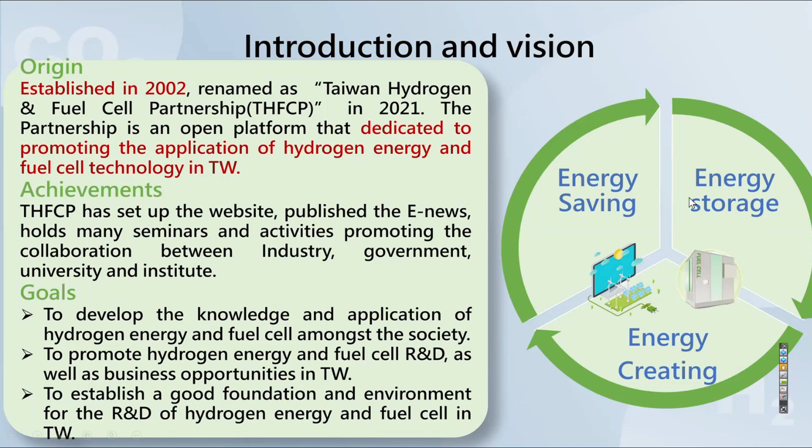Some information about the Taiwan Hydrogen and Fuel Cell Partnership: we were founded about 20 years ago. Back then, our vice president realized that hydrogen is a very important solution for clean energy, so we founded this organization. So far we have over 90 member companies, most of them private sector and some research institutes.

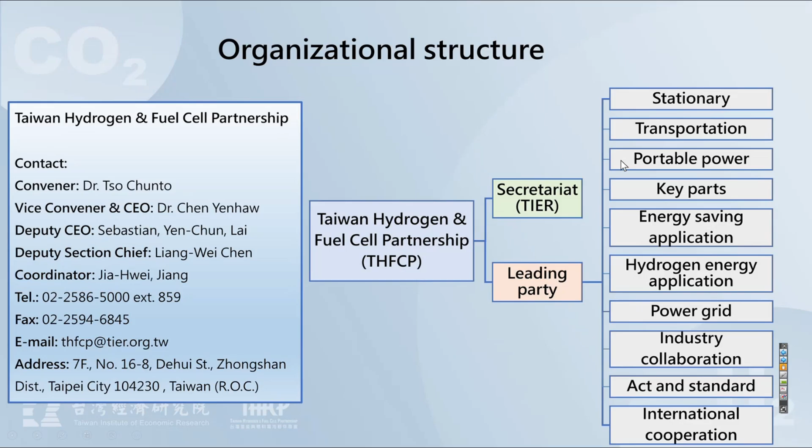Based on what they are specialized in, we have categorized them into different groups - for example, stationary, transportation, and portable fuel cell, and key components for fuel cell and energy saving applications, etc.

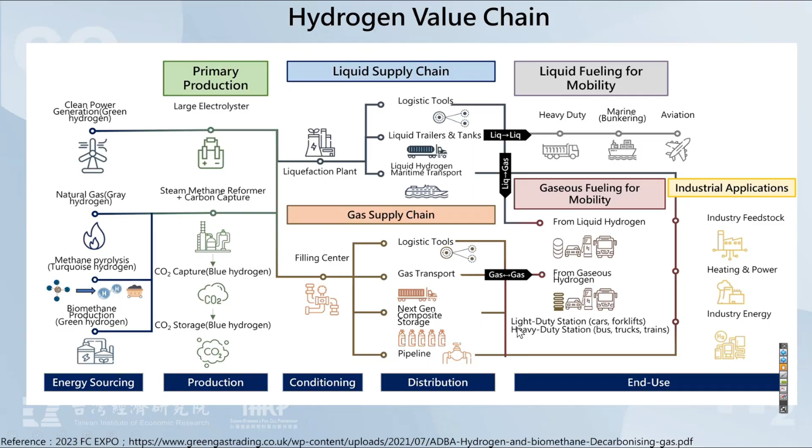Okay, so let's have a quick review of the entire industrial chain in Taiwan. This is what it looks like when we're talking about the hydrogen value chain, including different ways of producing hydrogen, its treatment, transportation, and utilization. You can use it for vehicles, industrial use, heat and power, etc. So when we're looking at hydrogen production, I have to say that in the past most of our companies were focused on key components for fuel cells or fuel cell production itself.

But later on, more and more companies devoted their technology into electrolyzers. For example, U-Hydrogen has developed their own self-developed PEM electrolyzer, and they have a demonstration site in Nantou. This site is combined with a fishing farm, so the hydrogen from the electrolyzer can be sold to end users for industrial use, and the oxygen is used in the fishing farm for the fishing industry.

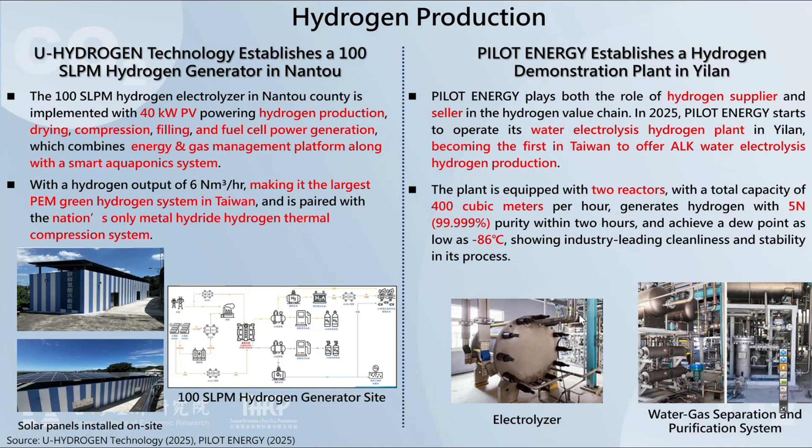Another company is called Pilot Energy. They have also developed their own alkaline electrolyzer, and they have a demonstration site in Yilan, on the northeast coast of Taiwan. They're also seeking chances to sell this clean hydrogen to industrial users.

And when we're talking about key component suppliers, I believe you all know about Bloom Energy. In the past, four of our companies have become key component suppliers for Bloom Energy, including Kaori and Porite, AcBel for electrical management systems, and Plus Metal. Combined, they account for about 30 to 40% of Bloom Energy's SOFC cost.

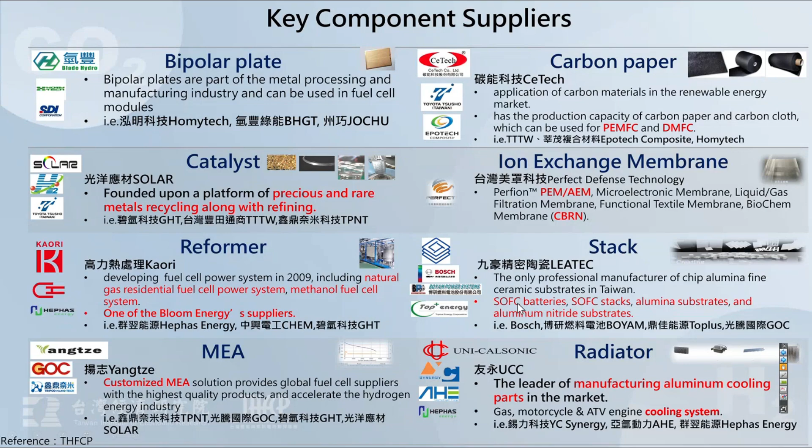And not just these four companies, there are also many other players, including bipolar plates, catalyst, reformer, MEA, carbon paper, IEM, stack, radiator. I'm not listing all of the companies, but we just want to show that there are many players in this business in Taiwan capable of providing these key components.

And we're not just the key component supplier, we can also be a consumer of fuel cell. I believe you all know Taiwan is a country very famous for semiconductor manufacturing. But when the net zero trend comes, these manufacturers need to reduce their scope 2 emission. That's why more and more companies are willing to implement fuel cell as their backup power or baseload power.

For example, one of the ICT firms called Unimicron has spent 4.041 billion NT dollars to build up to 10 megawatts of Bloom Energy's SOFC, using it as baseload power spread around their factory.

And also another company called Porite, which is also a supplier of Bloom Energy, has also about to purchase 1.2 megawatts of SOFC, also using it as their baseload power.

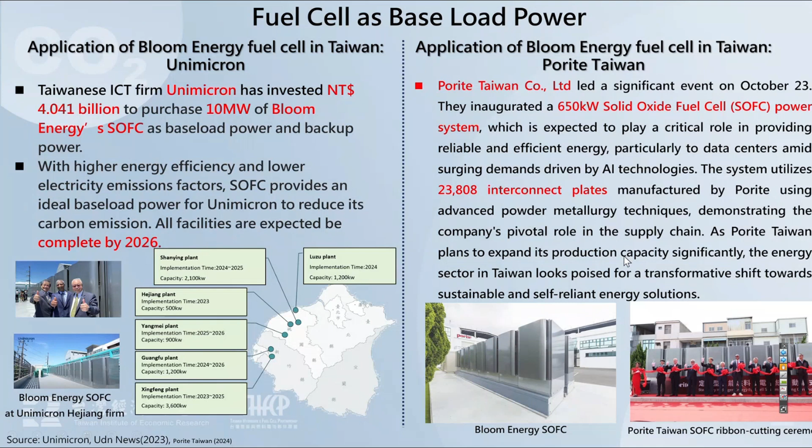We're not just the consumer, we can also be the producer of electrolyzer or fuel cell. For example, Delta, a world-known energy solution company, also has a branch in India.

Back in January 2024, they signed a contract with British Ceres Power to acquire their technology on SOFC and electrolyzers. So far their production line is about to be ready by this year, and we believe they'll be able to produce up to 10 megawatts of SOFC and 30 megawatts of SOEC annually.

And these are some products that have been developed in Taiwan by local companies, for example like CHEM, Toplus Energy, M-Field, Kaori, and hipower. Some of them are using methanol water and some of them are using hydrogen.

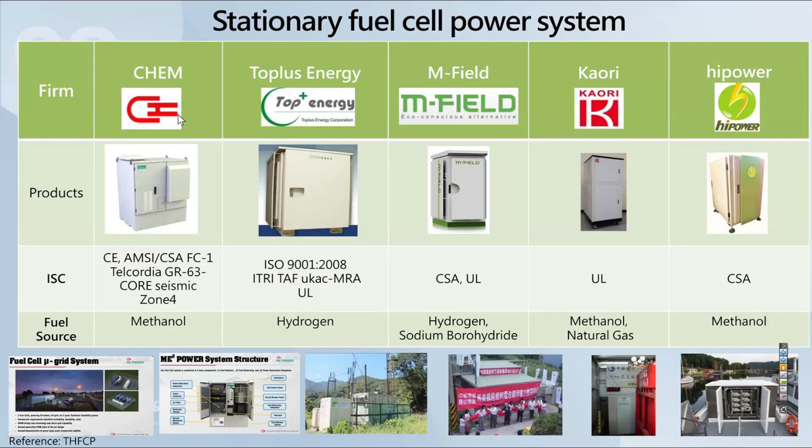Just want to show that these Taiwanese companies, although they might not be super large scale, are very good in R&D and product development. So with cooperation with these companies, they have developed their products in the past.

Back in 2015 to 2020, we have the THFCP. We have been working closely with the government, with the National Communications Commission and the Energy Administration, to help them build up so far over totally 60 demonstration projects across Taiwan.

All of these are in a rather small scale, for example 5 kilowatts, 20-something kilowatts. All of these fuel cells are used as backup power for public-owned housing or community centers, or some of them are located in remote areas.

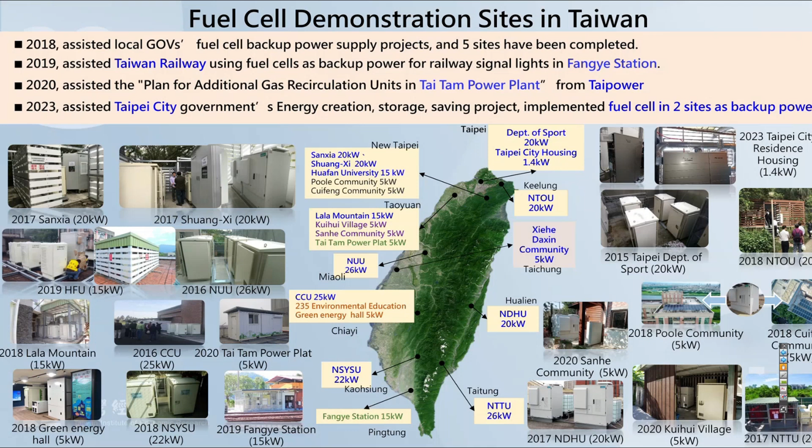In these cases, the fuel cell is used as backup power for cell phone bases in remote areas. Taiwan is a country that's often disturbed by either earthquakes or typhoons, hurricanes. So once these natural disasters happen, it's very important for these remote areas to still have backup power to reach out for help.

Due to regulations and restrictions, so far we don't see so many hydrogen vehicles on the road. However, in the past, many of our companies have also worked with the Ministry of Economic Affairs on pilot projects.

In the past, we have developed go-karts, drones, boats, forklifts, park cars, scooters, and passenger cars, and buses are still ongoing in development.

And so far, we have built our first HRS in Kaohsiung, in the southwestern part of Taiwan, built by the China Petroleum Company and Linde.

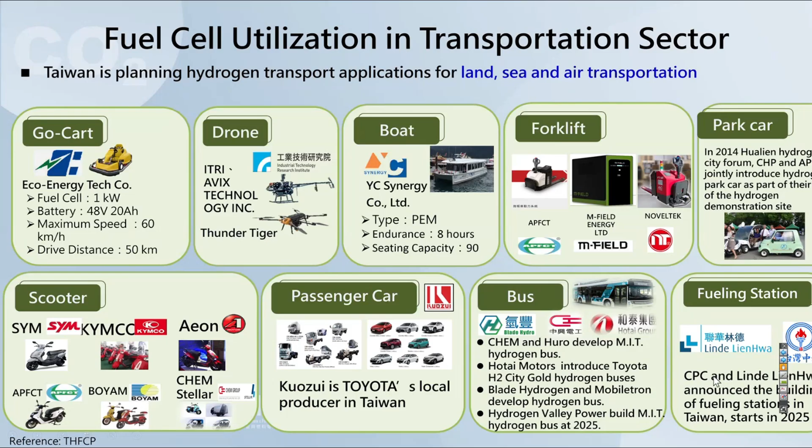And this is a big picture of the entire supply chain, or I think we can call it an ecosystem, about the hydrogen and fuel cell industry in Taiwan. On the left-hand side, you can see fuel cell from raw material to stack and system application. We've got a lot of companies capable of providing these key components or systems.

As for the peripheral product, when we're talking about alloy tank, methanol supply, purification systems, methane supply, and on-site hydrogen production, we've got a lot of companies all capable of being in this business.

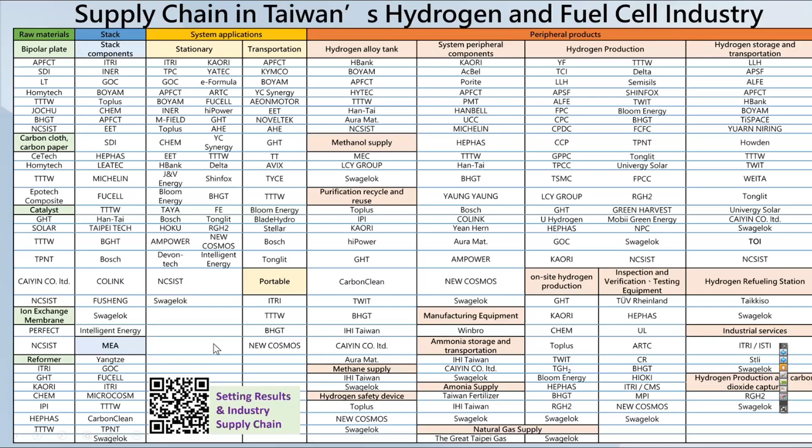Okay, so I know that in the previous meeting with GH2 India, India is with a very abundance of renewable energies and has a large focus on the production of green hydrogen or green ammonia. So later on, I'll be introducing what's happening now in the hydrogen and ammonia policy regulation and what will be happening in the future, perhaps in the business parts.

Okay, so if we take a look back at what's happening in Taiwan, back in 2022, we proposed our net zero emission plan, and based on that plan, the previous government came up with 12 key strategies, and hydrogen is one of them.

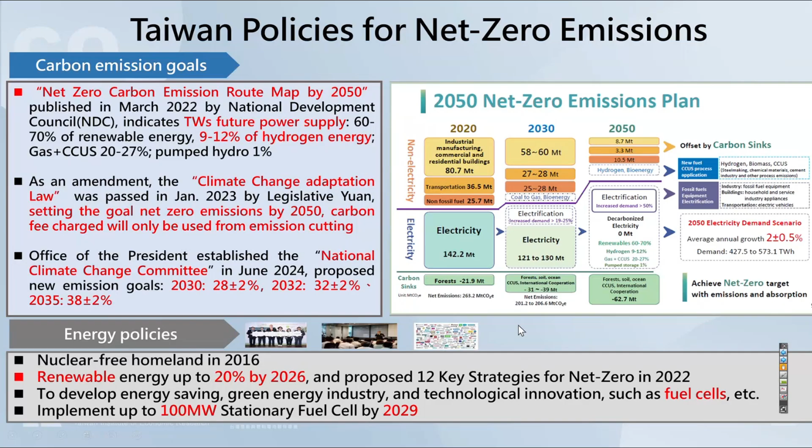Back in 2022, hydrogen was focused on its utilization, infrastructure, and local production. Later, the present government issued a revised policy last year in January on hydrogen and ammonia, called the Hydrogen and Ammonia Supply Chain National Flagship Plan.

It's jointly supported by the Ministry of Economic Affairs, the National Development Council, and the Ministry of Environment. So these are the policy parts. I'll be moving on to more detailed information about this policy.

And if we take a look at what's happening with our regulations, the Energy Administration Act has so far included hydrogen as one of the energy resources, and the regulation for hydrogen fuel HRS has also been implemented back in 2023.

The Ministry of Transportation and Communication is providing a subsidy project for hydrogen buses. These numbers have been updated. So far, they are providing up to 20 million NT dollars per FCEV bus, and expect to bring it up to 60 FCEV buses by 2035.

With 20 million NT dollars per bus, this fund can basically cover up to 60 or even 70% of the cost for the transportation service provider to purchase the bus. It's a very great incentive.

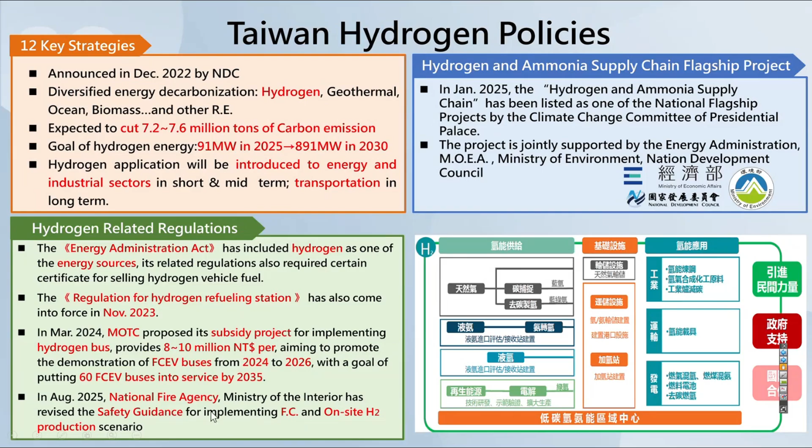Now about the National Flagship Project. So far, they have allocated more than 12 billion NT dollars to this flagship project, and it's divided into different types of goals, including the energy sector, industrial sector, and transportation sector.

But if you take a closer look at the energy sector and industrial sector, both of these basically have a large focus on using hydrogen or ammonia as a low carbon fuel, or what we call alternative fuels.

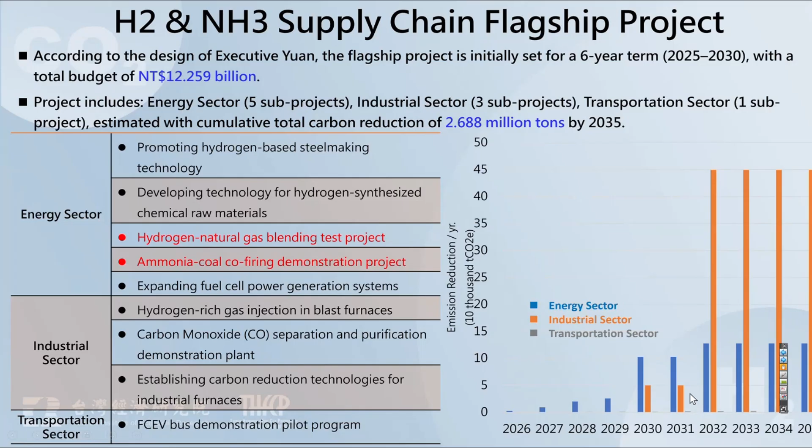If these goals are all successfully conducted, we're expected to have a cumulative reduction of up to 2.688 million tons of carbon emissions by 2035. And this is the carbon emission reduction by year.

If we take a look at some more details on what's happening with the regulations, there are both pressures and incentives for companies to use more hydrogen or more fuel cells. On the pressure side, it's called the compulsory user of renewable energy.

Based on our Renewable Energy Development Act, large scale power users, by definition those with a power contract over 5,000 kilowatts, will be defined as compulsory users of renewable energy. All of these compulsory users will be required to use 10% renewable electricity biannually.

So this provides an incentive for them to use either green hydrogen, green ammonia, or implement more fuel cells. And also, the Energy Administration is providing a subsidy demonstration program for the implementation of fuel cells.

It provides 70,000 NT dollars per kilowatt, and ideally this can cover up to 50% of the CAPEX and OPEX for implementing the fuel cell.

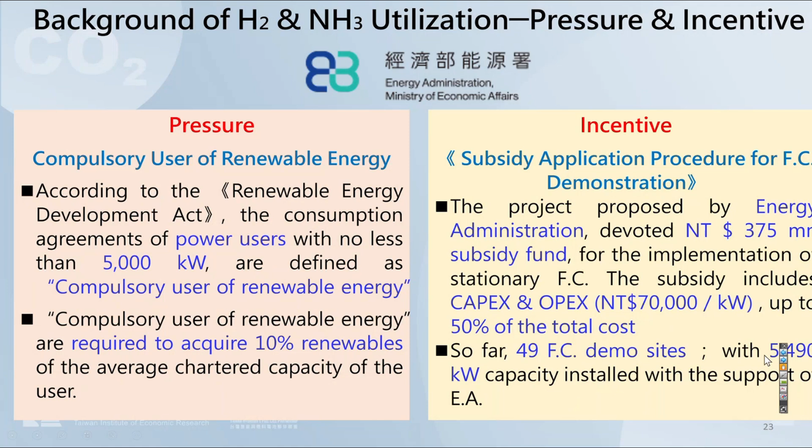So far, we have 49 fuel cell demonstration sites spread around Taiwan, with over 5,000 kilowatts of capacity installed.

And not just these regulations, let's say incentives or pressures, but also some actual incidents that could incentivize industrial users to implement more fuel cells or other energy solutions using hydrogen or ammonia. So everything started back in 2017.

The Electricity Act mandated decommissioning of all nuclear plants by 2025, and that actually happened. And now we can see that Taiwan is called the 'no nuclear homeland' - the policy is called that way.

But so far, having removed all nuclear power, the reliance on coal, natural gas, and fossil fuel has brought the percentage of fossil fuel use up to over 90% of power on the 18th of May, 2025, the day we shut down our last nuclear power plant.

And as we all know, renewable power fluctuates a lot, and Taiwan is a small country. We have very limited land and economic exclusive zones.

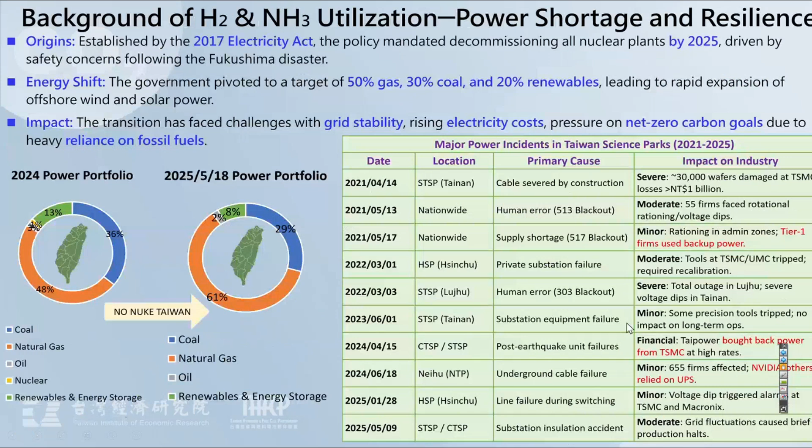So again, if these AI data centers are also facing these kinds of energy and electricity incidents in the future, they would definitely be seeking some other solutions to secure their energy supply. So now hydrogen has become a topic that's been more often discussed in Taiwan upon these issues.

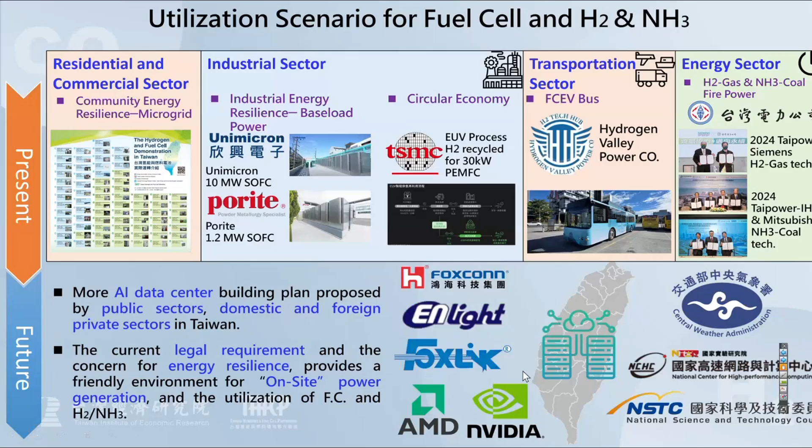And the last part of my presentation will be the design of the hydrogen and ammonia campus in Taiwan. So I'll move it fast.

According to a very expert research institute, ITRI, our later speaker, and according to their estimation, the hydrogen and ammonia demand by 2050 will be up to 4.06 million tons for hydrogen, and demand for ammonia will be up to 3.15 million tons. Among these demands, all of the ammonia is expected to be imported, and for hydrogen, up to 2.35 million tons will be imported.

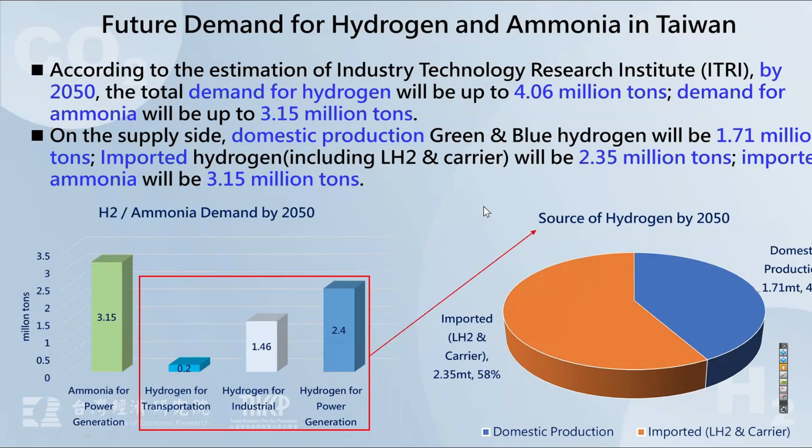Which makes Taiwan a very large and potential importer of either ammonia or hydrogen, either in liquefied or gasified form. And if we take a look at some potential off-takers, or what we can call the key players in the future...

The Taiwan Fertilizer company, still now a state-owned enterprise with a very long developed history, has very good expertise in the treatment of ammonia and the production of fertilizer. In recent years, they've realized their role cannot just be producing fertilizer for agricultural use. They can also be an importer, importing ammonia as an energy provider.

So in 2023, they imported their first bulk of blue ammonia from Saudi Arabia. So far they have two liquefied ammonia terminals and storage tanks in the central part of Taiwan, called Taichung Seaport. In the future, they're expecting to build up to 80,000 tons of storage capacity, making Taiwan Fertilizer a very great potential cooperation company for India.

And not just Taiwan Fertilizer—if we take a look at the end users, the China Steel Company is one of the earliest steel making companies that claim they will start using hydrogen and ammonia for their steel making process as an alternative fuel. And also CPDC and LCY Chemical.

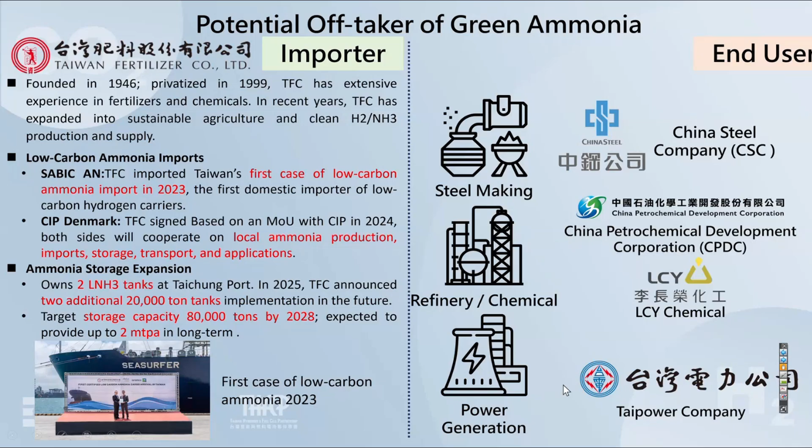In the last two slides, I'll share some information about what we call the campus in Taiwan. There are many words in this slide, but I won't go into detail, just give a brief introduction of the idea. So far we are working closely with the government to help them design two hydrogen and ammonia campuses. By campus, we mean it includes both the unloading terminal and also the utilization scene in these two places. One is in Taichung port, in the central west part of Taiwan, and the other is in Kaohsiung, the southern western part of Taiwan.

So let's take a look first at Taichung. So far they've got enough vacancy to build more terminals in the future, and China Petroleum Company also have a tank for oil and chemicals in Taichung. And the most important thing is that there is a coal-fired power plant which is only 500, I think it's less than one kilometer away from this expected site for the terminal.

So if in the future we are able to build the ammonia terminal here, the ammonia can be sent directly by pipeline to the coal-fired power plant, which is an ideal demonstration. And it's not just a demonstration, we don't mean that it's small scale - it could actually bring a large demand in the future.

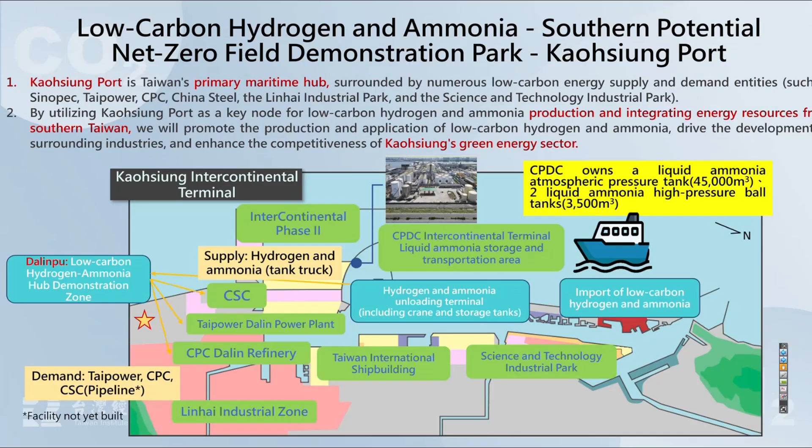Another thing is that the harbor administration in Taiwan is now starting to plan to build alternative fuel bunkering service in Kaohsiung port to attract more sea cargo ships to come to Kaohsiung to do refilling. So far they're thinking about methanol and also biodiesels, but now ammonia is also on our table. So in the future, the bunkering service for ships and the supply of alternative fuels for industrial use could be the two key utilizations of ammonia in the future.

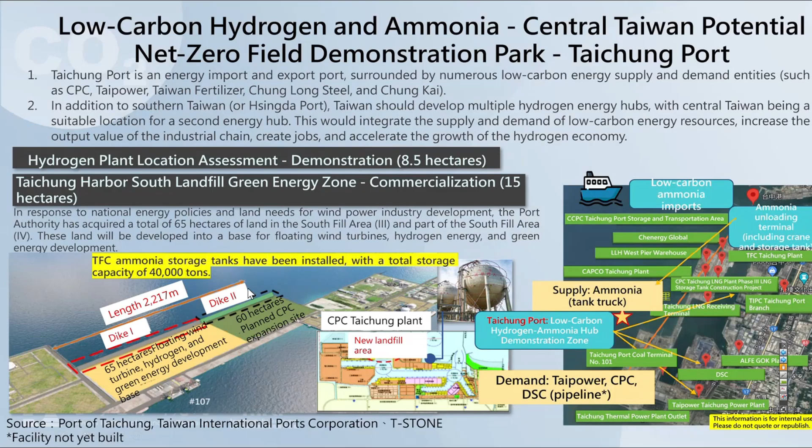So these two sites, despite not yet being built, have demonstrated the great potential of ammonia demand in Taiwan in the future.

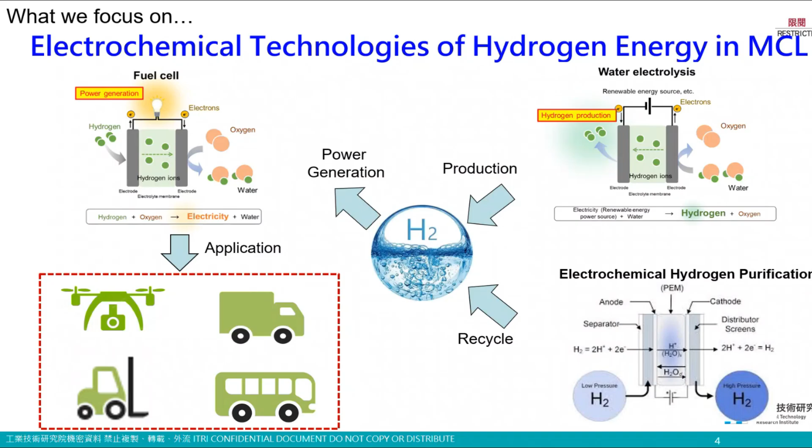In technology development, there are two main categories at ITRI: the air-cooled fuel cell power system and the liquid-cooled fuel cell power system. In these two types, we choose different advantages for different applications, such as the direct air-cooled fuel cell, because we can remove unnecessary BOP components and reduce system weight to increase power density.

So it's suitable for UAV applications or for mobile power banks to extend power generation.

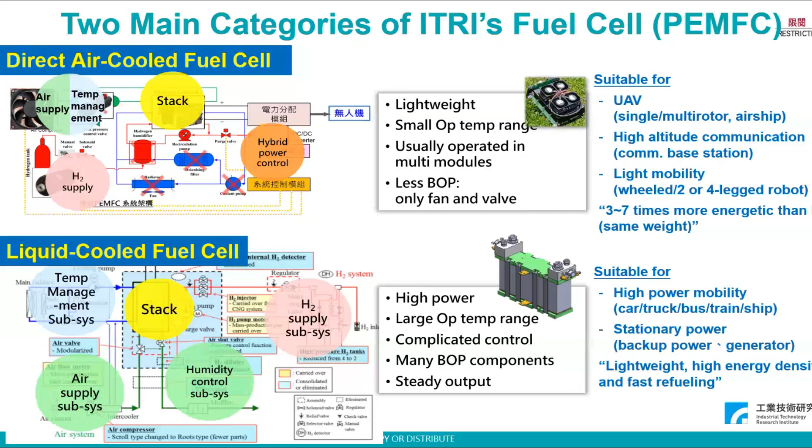If you want higher power, we can develop the liquid-cooled fuel system. But this system has a more complicated composition because we use many controls to control the air supply, humidity, and hydrogen supply in the system to get stable power generation. It's suitable for bus, truck, or stationary power applications.

In our division we develop different specs for different applications, such as the air-cooled stack, which we assemble and integrate into a system to supply power to drones for longer flight time. We also developed a liquid-cooled stack that can be embedded into a power system to generate power for trucks and buses.

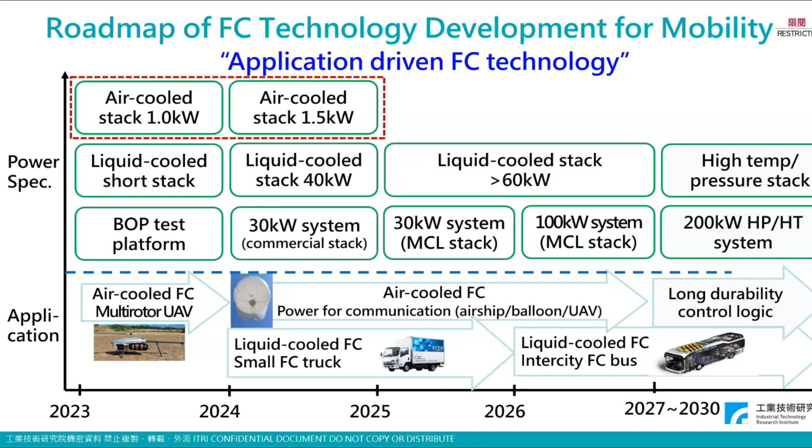So in this topic, we will focus on the drone application. Two critical parameters are concerned in drone development: one is the hover power, and the other is the cruise time. These decide the drone's performance.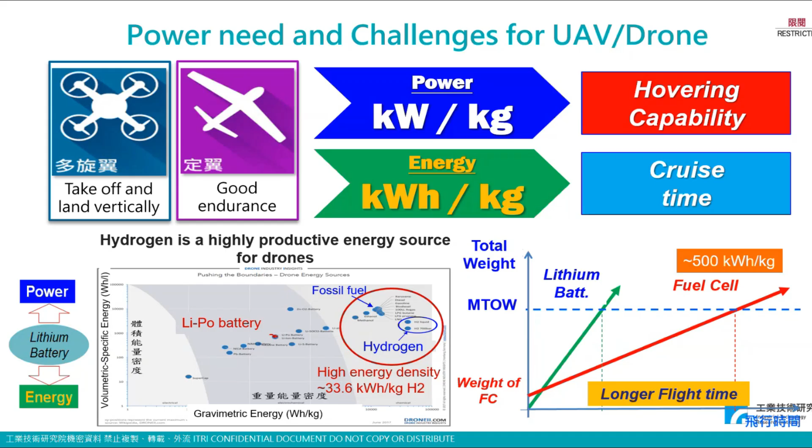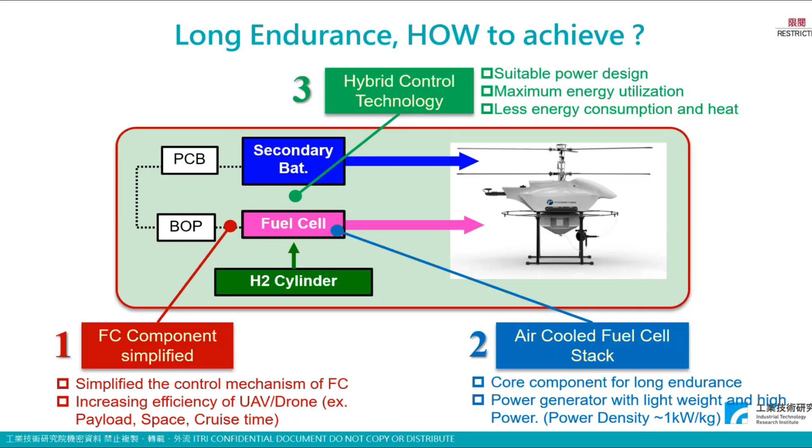So how can we obtain a better drone design? Three important components we need to consider: first, we should simplify the fuel cell components; second, we can get a high power and lightweight fuel cell stack; and third, we have high efficiency hybrid control technology.

In the traditional fuel cell system, the composition is complex, so we should simplify it by removing unnecessary components like the humidifier or water cooling system. We use a non-humidified MEA that can operate in a low humidity environment to get high power.

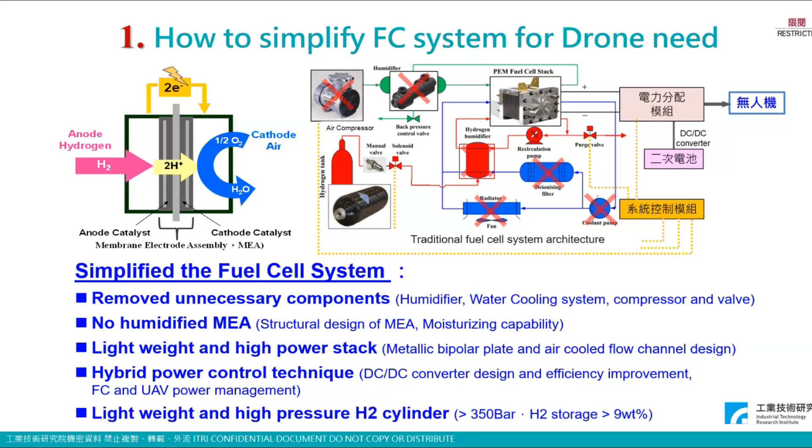We also use a lightweight, high-pressure hydrogen cylinder to increase the hydrogen energy, providing higher energy density. Second, we developed a lightweight and strong mechanical strength UAV body design to get higher strength while reducing body weight.

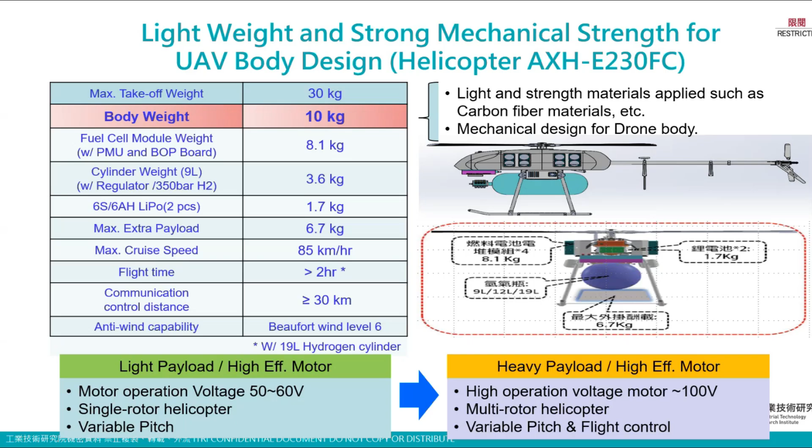In this research topic, we also achieved a light payload with a high efficiency motor in the voltage range of 50 to 60 volts, and for heavy payloads, a high efficiency motor in the range of 100 volts. So we can get a lightweight drone body with higher strength mechanical design.

And the other aspect is achieving a high performance fuel cell stack, where we use a metallic bipolar plate and assemble a high performance MEA to get the high performance stack.

And also we assemble the lightweight BOP and optimize the power control. So in the fuel cell stack development, we can get a higher power density in our development.

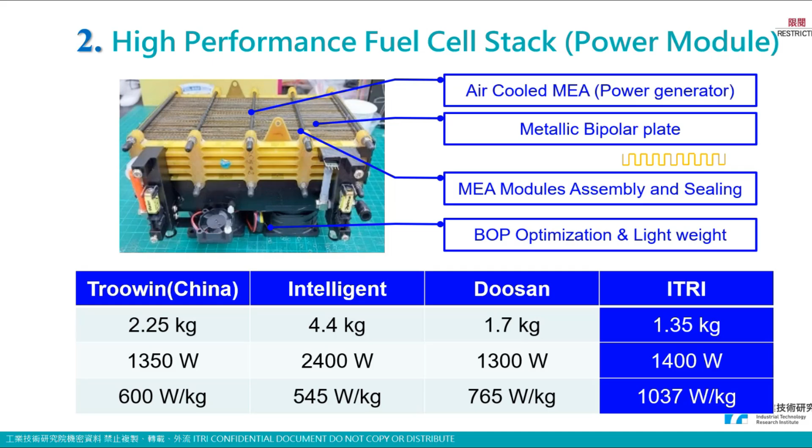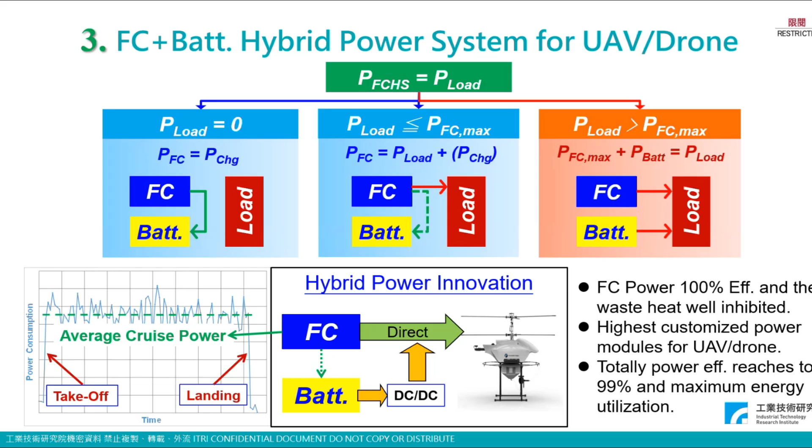And then in the fuel cell hybrid power system for drone application, because in different scenarios, if the fuel cell power is higher than the load needs, the fuel cell can charge the battery, and in different situations we can adjust the power output to optimize the operation efficiency. So in our system, we developed a high efficiency hybrid power technique to get nearby 100% efficiency to extend the flight time.

So in the fuel cell hybrid power helicopter, we combine a higher power density stack with multi-stack control and high efficiency hybrid power design. We developed a longer endurance fuel cell helicopter, and this drone has been evaluated in many flight tests.

The accumulated flight distance is over 1,000 kilometers. Because the weight of the drone is higher than 25 kilograms, we also passed the special inspection certificate of the Civil Aviation Administration. So this drone can perform different kinds of missions and applications.

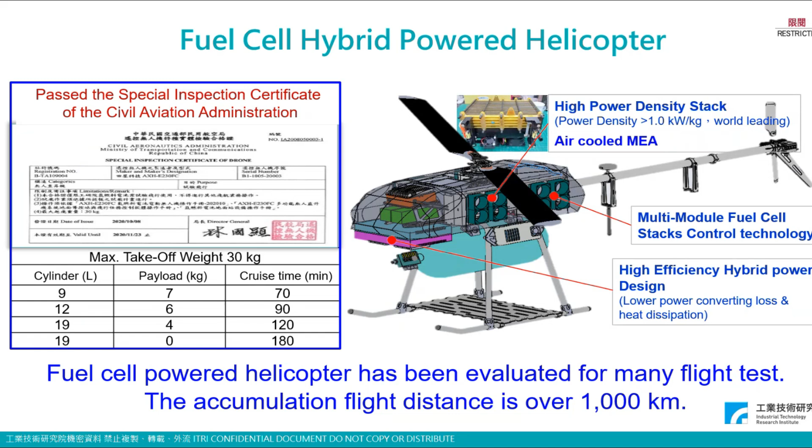So we did tests since 2020 to verify the fuel cell power drone stability, to test the flight, to understand the longer flight time. And then we tested in different environments to deliver material and also get better performance.

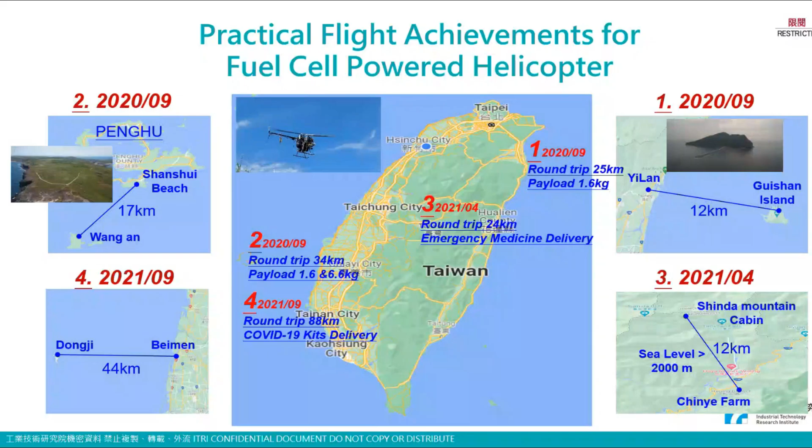In different tests, we completed mountain and cross-sea missions, and then we used autonomous flight GPS and emergency landing settings for the hydrogen drone, and we can monitor the flight route and ensure the safety of the drone.

In this case, the hydrogen drone is easier and faster to refuel by replacement of the hydrogen tank. So we also promote the fuel cell powered drone during these years, and also developed the high payload fuel cell tandem rotor UAV for the heavy carrier mission.

We also developed the lightweight fuel cell helicopter. The maximum takeoff weight is 25 kilograms, so it is unnecessary to pass the special inspection certification, so it can directly perform the mission we want to do.

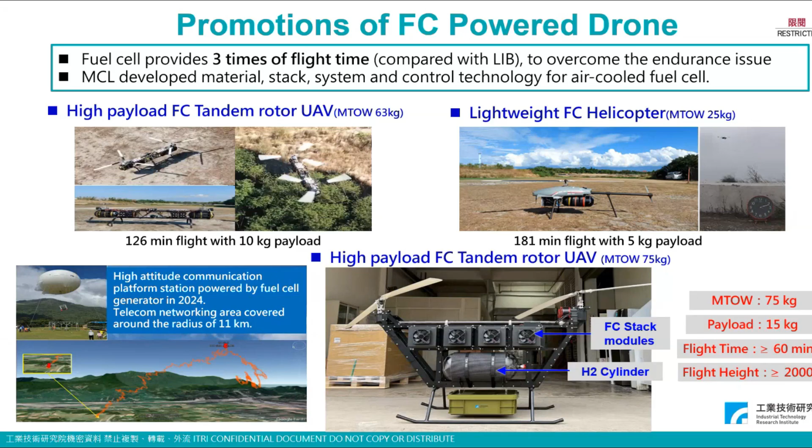Since 2019, we got funding from the government, and then we did a lot of research work and completed different kinds of drone development, and applied the drone to different applications.

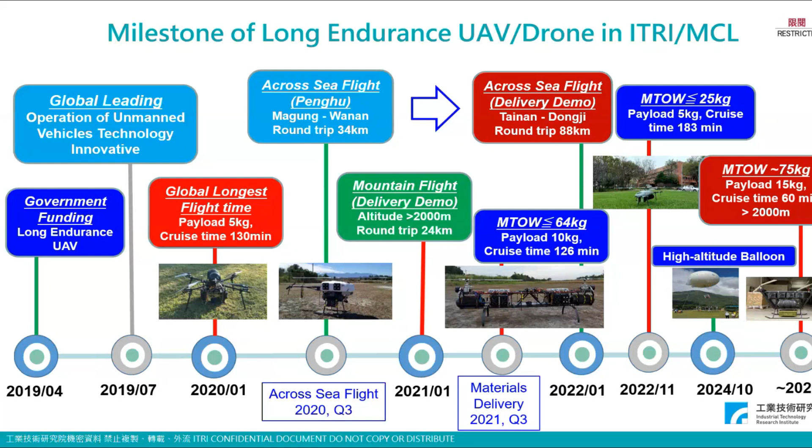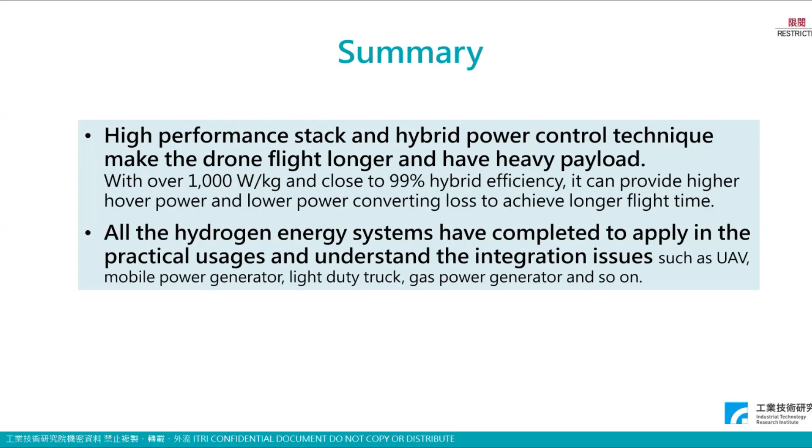So this is the last slide. Let me recap my presentation. The high performance stack and hybrid power control technique make the drone fly longer and have a heavier payload. In our division, all of the hydrogen energy systems have been completed and applied in practical usage, and we understand the integration issues. From this development achievement, in the near future we are looking forward to having an opportunity for collaboration with all of you. Thank you for your attention.

Sorry. Yeah. Yes, can you hear me? Yeah, very clearly. Thank you.

Okay, and good afternoon, everyone. This is Wen-Fu from IHI Taiwan, and it's my pleasure to have this chance to share the IHI Group fuel ammonia value chain, and also the Taiwanese market in Taiwan for everyone.

As for IHI, I would like to share more about the IHI business group. The first one is about the resource, energy, and environment business area.

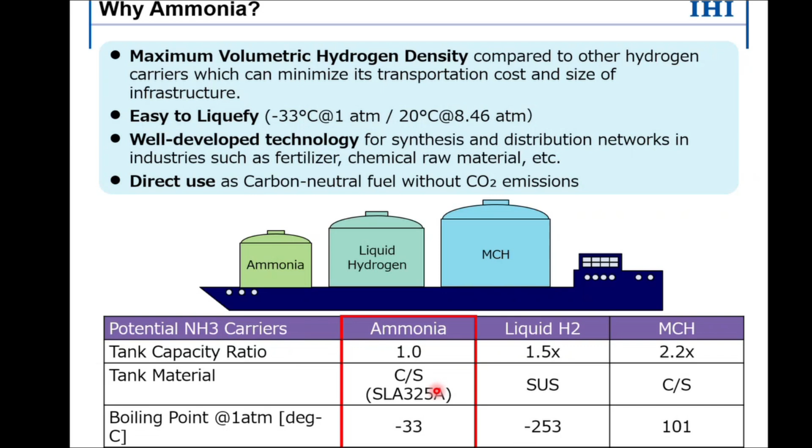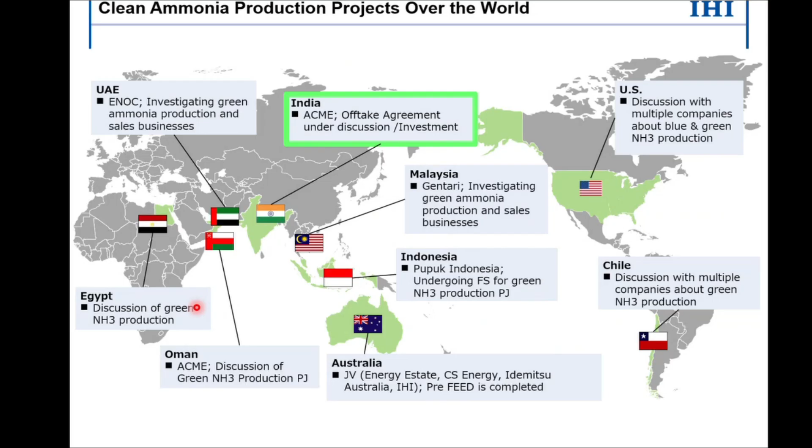Then it's about the IHI ammonia storage technology. IHI has been selected for the feasibility study for the hydrogen supply infrastructure development project in 3 locations: one near Hokkaido at the Tomakomai project, another at Soma, and the next at the Kansai area. So IHI is doing the feasibility study for storage technology in Japan.

Now we'll start to tell you about the IHI ammonia value chain. Why ammonia value chain? We can separate it into 3 phases: the first phase is production, the second phase is storage and transportation, and the third phase is utilization.

As you may know, IHI is a famous heavy industry equipment supplier, and we have our own technology for gas turbines and boilers. We started to modify our burners in the boilers, made some tests, and realized that ammonia can be the fuel for the next generation.

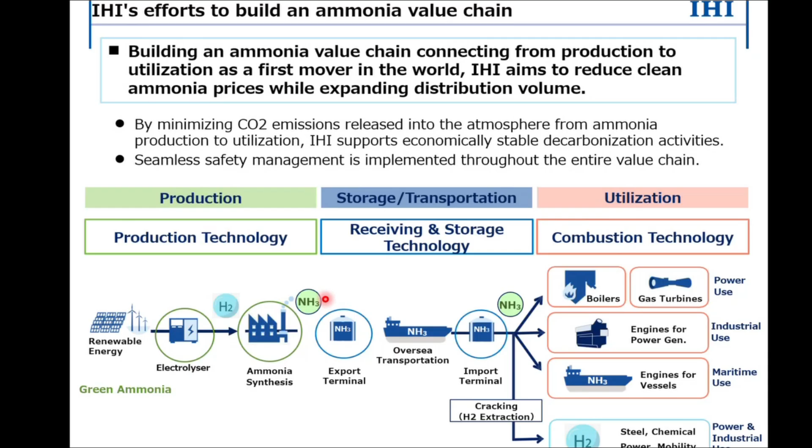So here you can see this is the IHI ammonia value chain as of today. We were the heavy industry equipment supplier, but now we are not just the equipment supplier — we are also the green fuel supplier, supplying green ammonia.

Here is IHI's ammonia utilization product lineup, and you can see we have products in different fields: power, maritime, and industry. In the power field, you can see here is the boiler. So please pay attention.

In the boiler, only the boiler, we use ammonia and coal co-firing. Below, these are old engines and the gas turbine - those are all 100% ammonia. Let me introduce you to the boiler first.

We developed the ammonia combustion technology in our boiler, and we did 20% ammonia combustion at the JERA's Hekinan thermal power plant in 2024, from April to June. The result was very good and everyone was satisfied.

We are developing the large gas turbine. We signed an MOU with GE, and we are trying to apply IHI's 100% ammonia combustion technology in GE's gas turbine. We are targeting 2030 to finish the development.

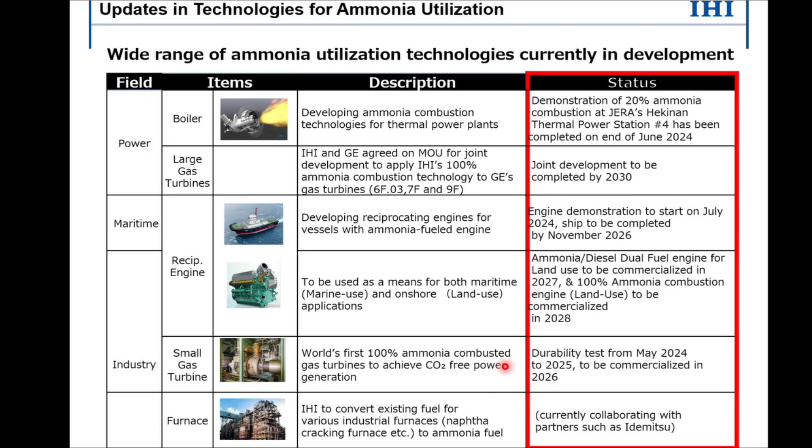The last one is about furnace application. This one is still under development.

Here I would like to introduce IHI's decarbonization roadmap in the power sector. For the gas turbine, we will have 2 megawatts completed in 2026, and we will have 400 megawatts completed by 2030.

For the engine, that would be marine use and land use, commercialized in 2027 and 2028 respectively. For the boiler, we completed 20% ammonia and coal co-firing in 2024, and we plan to do ammonia and coal co-firing at more than 50% by 2028.

In this roadmap, you can see we are now in 2025, heading to 2050 in the future. You can see why the boiler curve goes like this - that's because IHI applied our ammonia technology to reduce coal consumption in the boiler firing.

We try to maximize usage so the new or midterm boiler can be used until the end of its lifespan. For example, if a boiler was operated in 2020, the lifespan would be 40 years, ending by 2060. If they can apply ammonia as a fuel, the boiler would not need to be demolished or suspended.

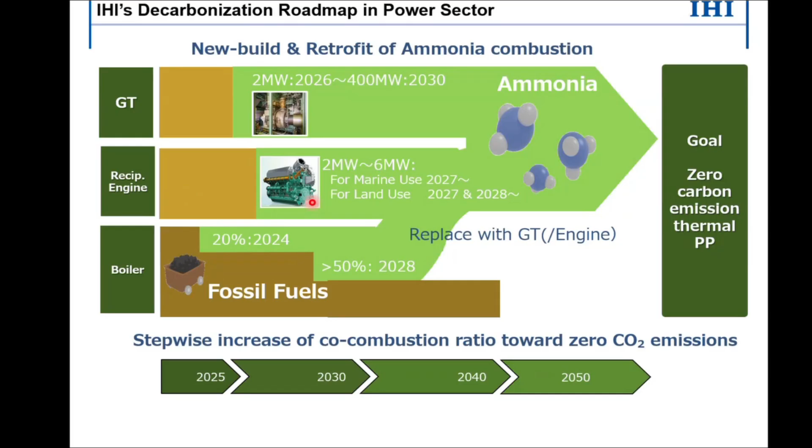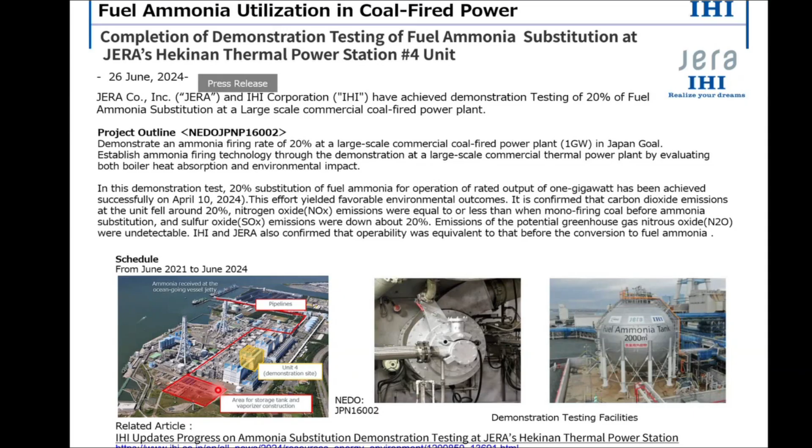This is our press release about the 20% ammonia firing we conducted, starting April 10th, 2024 and completed in June. Here is the bird's eye view of the project - we conducted the boiler ammonia firing in Unit 4, here is the demonstration facility with the pipeline, and these are the testing facilities.

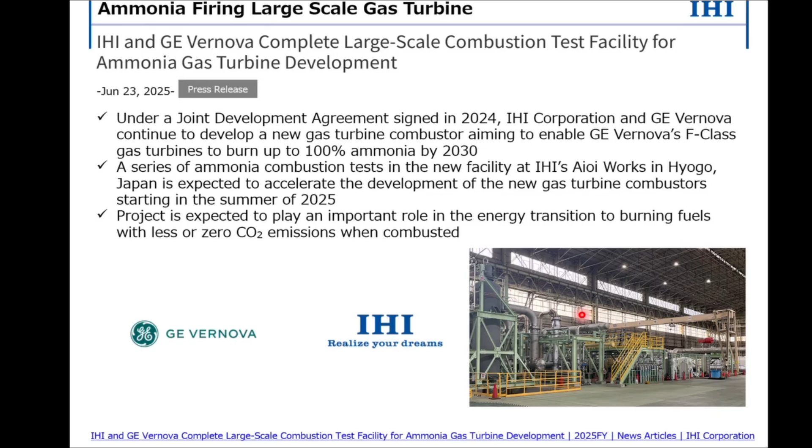This is our press release about signing the MOU with GE, and we already have our test facility established at our Aioi Works in Hyogo.

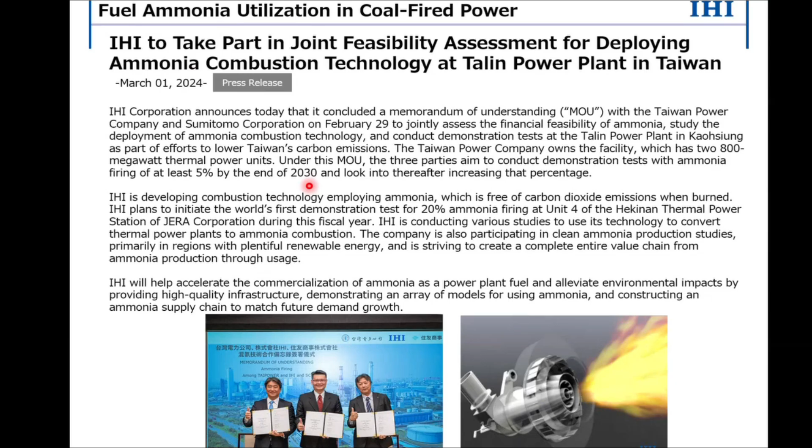About the Taiwan market, we signed an MOU for the feasibility study with TPC on February 29th, 2024, and we are studying ammonia firing of at least 5% by 2030 with TPC. Everything is still under discussion.

We also signed an MOU with Taiwan Fertilizer, who are the biggest ammonia supplier in Taiwan, to jointly develop the ammonia business in the Taiwan market. Now this is about the engine.

IHI also worked with an Indonesian partner to complete Southeast Asia's first ammonia combustion trial in Indonesia. I would like to highlight that the boiler used in this project is not an IHI boiler.

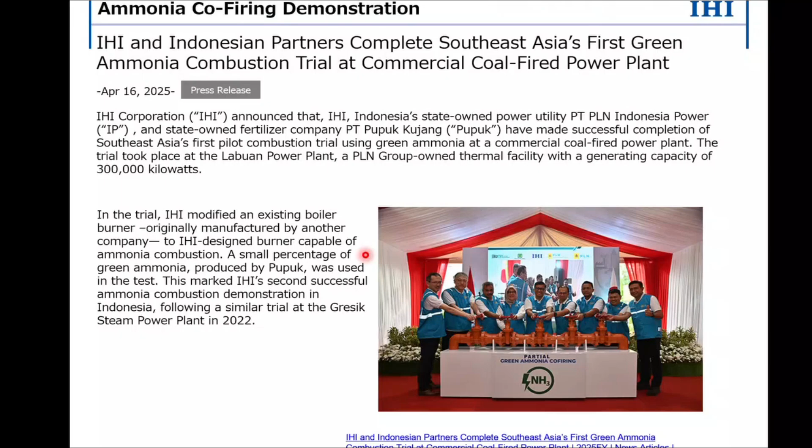And in this boiler, non-IHI boiler, but we can do the ammonia co-firing. So I would like to highlight that in IHI we are not just capable for IHI OEM's boiler, but also other OEM's boilers we can make it.

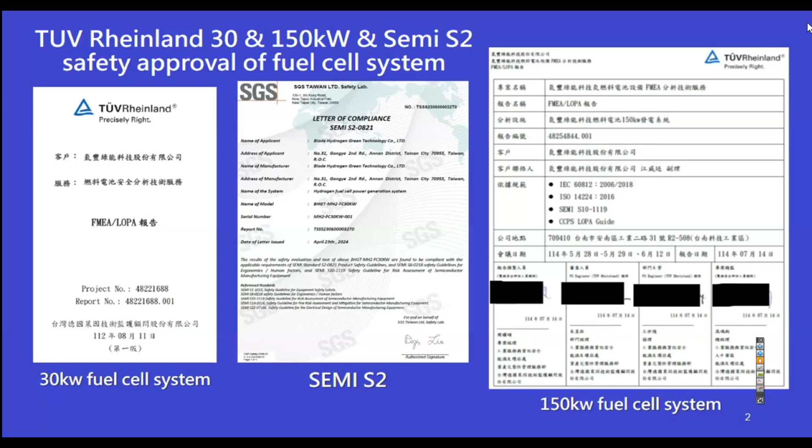Next page. Okay, the first challenge in Taiwan is where to get cheaper hydrogen. If hydrogen will be one of the energy sources, the cost and stability of supply is most important. If we're using pure hydrogen in Taiwan, that is really so expensive, it's almost impossible to commercialize, except for some backup power.

So the first thing we need is to use Taiwan's huge amount of industrial byproduct hydrogen. That means Taiwan has a lot of petrochemical companies, and Taiwan has a lot of very famous semiconductor companies. When they do their manufacturing process, they also generate a lot of wasted hydrogen. This hydrogen means not pure hydrogen - it's composed of a lot of different compositions. So we're using this byproduct hydrogen to generate power and then reduce CO2 emissions. Please, next page.

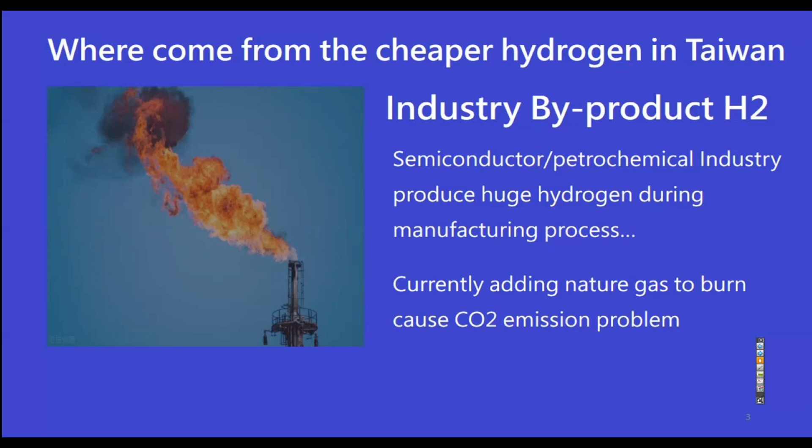In the previous time, our pain point was how to deal with this byproduct hydrogen. We needed to use a scrubber to burn it, and we also needed natural gas. So that would increase our ESG problem. So our solution is - please, next page.

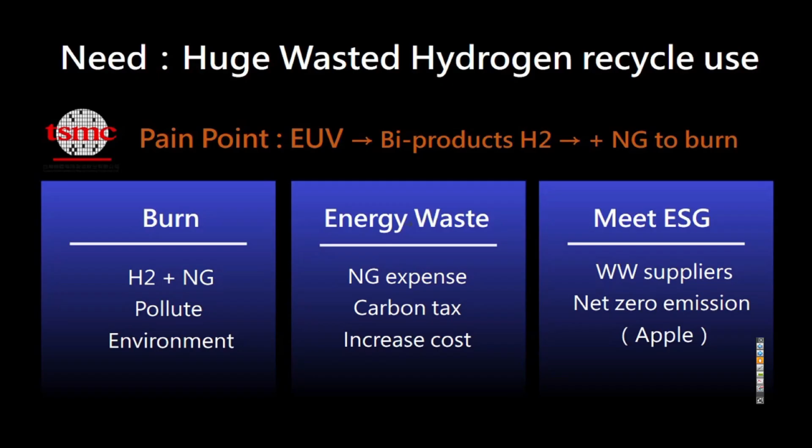We're using the fuel cell, because we have many years dedicated to the fuel cell, so we are well known for how to control the fuel cell technology. Unlike other fuel cell companies, they also only need pure hydrogen. Our fuel cell system is quite different - we allow some syngas. Syngas means we don't need it so pure, like 99.9% very high concentration of pure hydrogen. No, we don't need that. Our hydrogen concentration only needs 50%, that's enough. So we're using this to generate electricity power.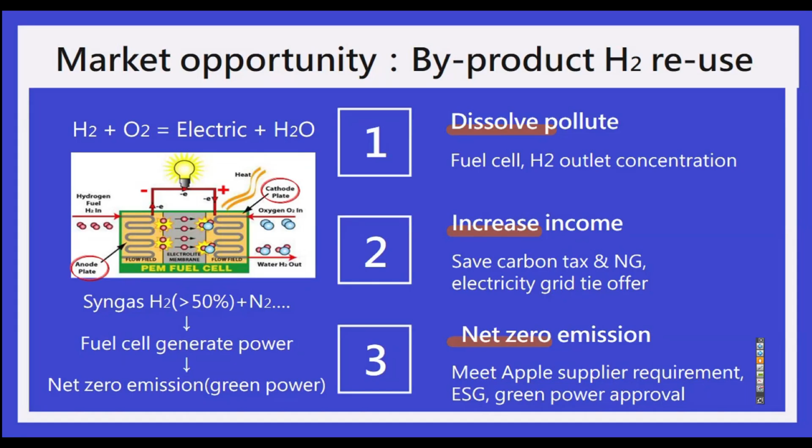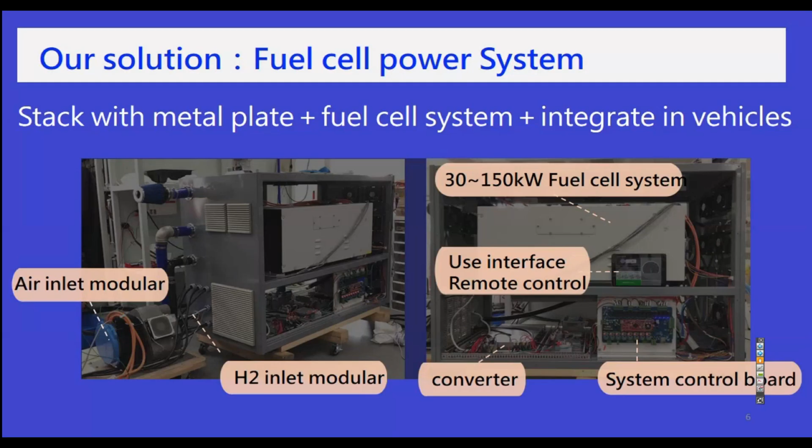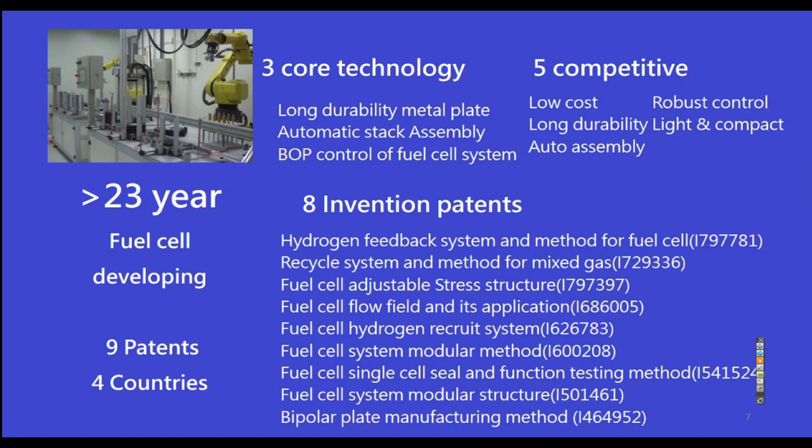Please, next page. This is what we do, and we make our metal plate stack, and we make the BOP - that means the peripheral devices like the air pump, the hydrogen pump - and we also make the power electronics. Next page. So our key technology, a lot of our innovation is focused on how to deal with the syngas hydrogen. Please, next page.

This is our stack automatic assembly line. We're using AI to accumulate a lot of assembly parameters. Then we put it on the cloud. The cloud will analyze it and make it more intelligent. This lets our manufacturing yield rate be much higher. It's all robots operating, there's no need for manual work.

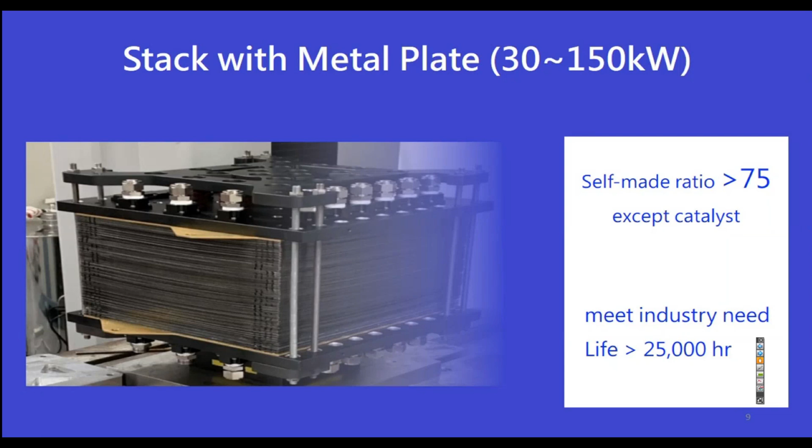This page shows our metal plate stack. It is more criticized by its life, so our life now can reach the industry standard, more than 25,000 hours. Except for some MEA, almost all other components in the stack we can make in Taiwan.

We're using syngas as the input. We also got green power certification in Taiwan, meaning like solar or wind power, we can be provable by green power and generate electricity. This is our first certification in Taiwan, and we can sell the green power.

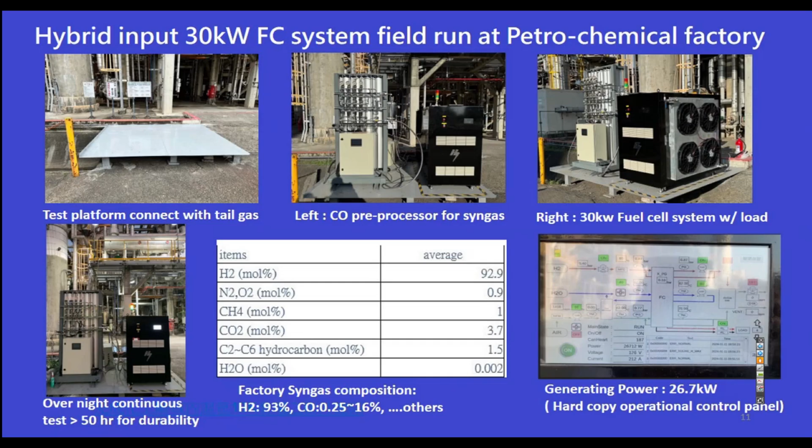This is an example. We put our hybrid input fuel cell machines in a petroleum chemical company. Their tail gas composition is so complicated - they have hydrogen, nitrogen, oxygen, methane, CO2, and even water. We can directly input this into our fuel cell machine, and they can generate power for a long time.

This is another application, in Taiwan's more famous semiconductor company, TSMC. During their EUV manufacturing, they generate a huge amount of syngas tail gas, with hydrogen concentration only about 50-60%. But we can directly input it, no need for PSA or other very expensive devices.

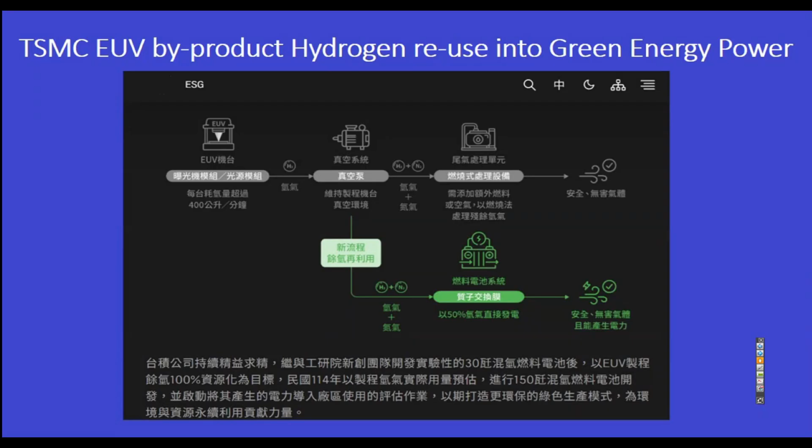Two years ago, we installed 500 kilowatts in Taiwan at another petroleum company. Their hydrogen tail gas concentration is only 90%, with the other 10% being CO, CO2, nitrogen, and oxygen. We set up 500 kilowatts - this is Taiwan's first hybrid input fuel cell machine company, and we still generated power.

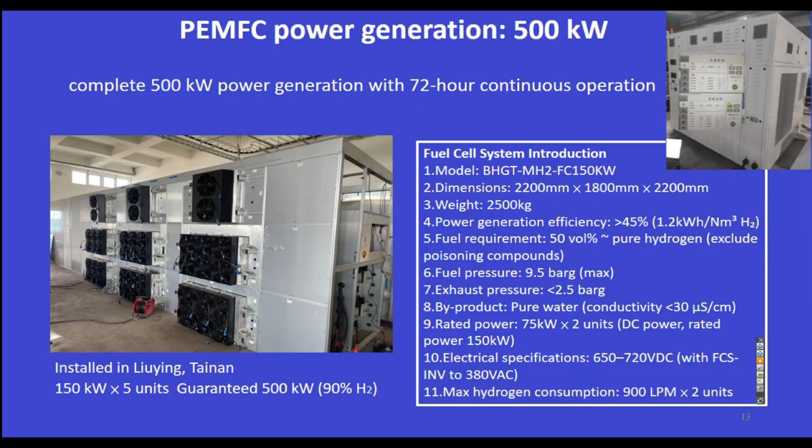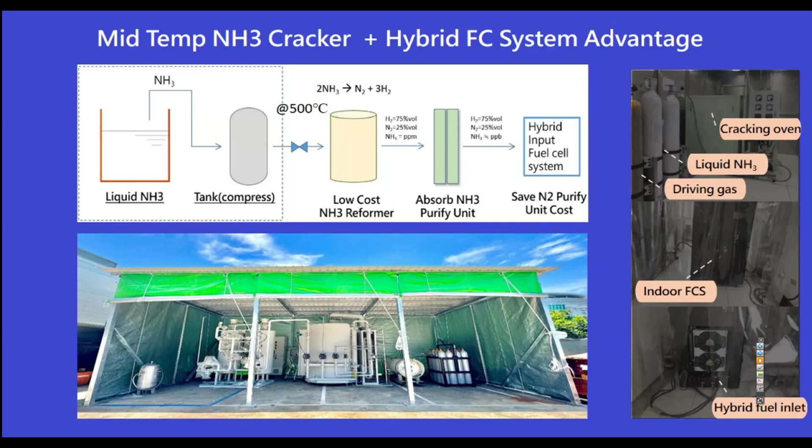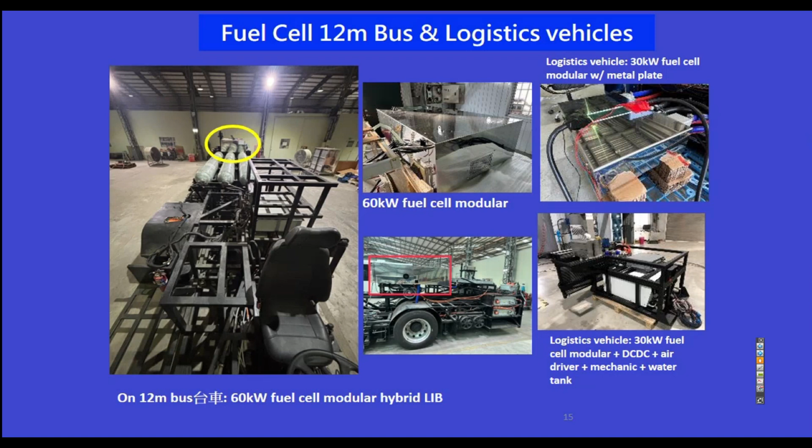For pure hydrogen, we have also been developing for several years. This is our fuel cell bus, 12 meters, with its chassis, and we also have a logistics vehicle at 30 kilowatts.

We are also developing boats. Taiwan is an ocean country surrounded by the sea, with a lot of isolated islands, so we need boats for long ranges. The distance cannot be met by lithium batteries, so we're using fuel cells with tanks.

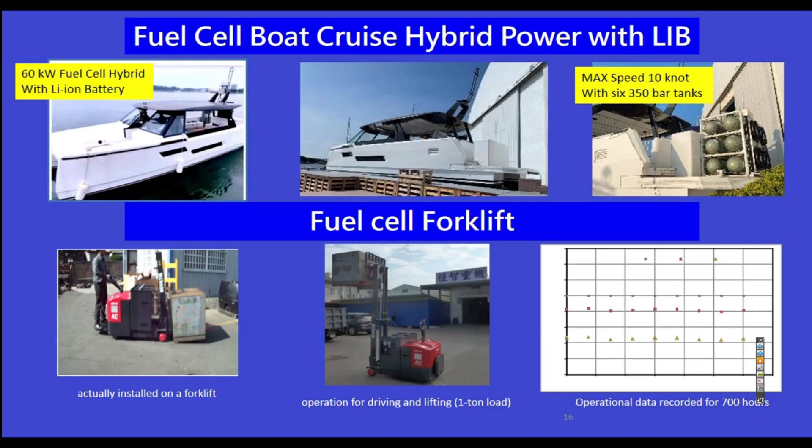We also develop different kinds of vehicles, like the fuel cell forklift, and UAVs that can run at least 2 hours with a 350 bar tank. We are also developing motorcycles in Taiwan, since Taiwan has a lot of motorcycles.

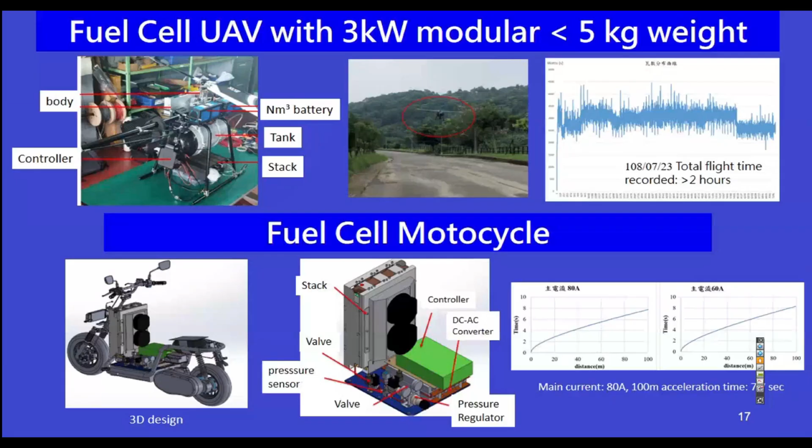We are also developing electrolyzers - this is our electrolyzer stack. Now we have two kinds of products: one generates 0.5 cubic meters per hour, and the other 2 cubic meters per hour. This is our BOP.

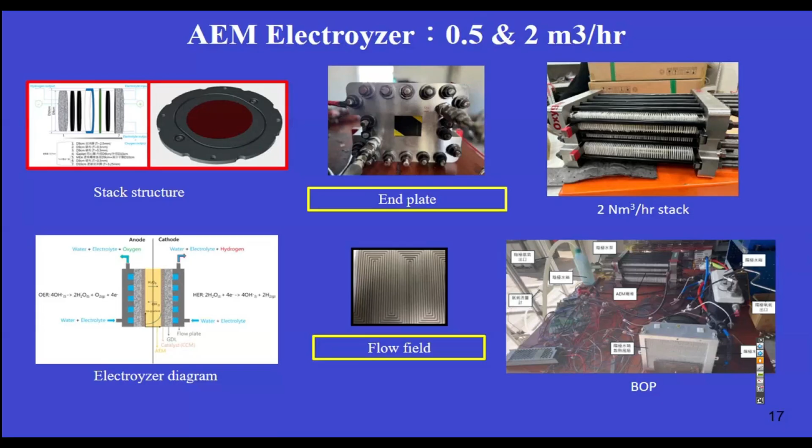This is my whole presentation. Thank you for your attention.